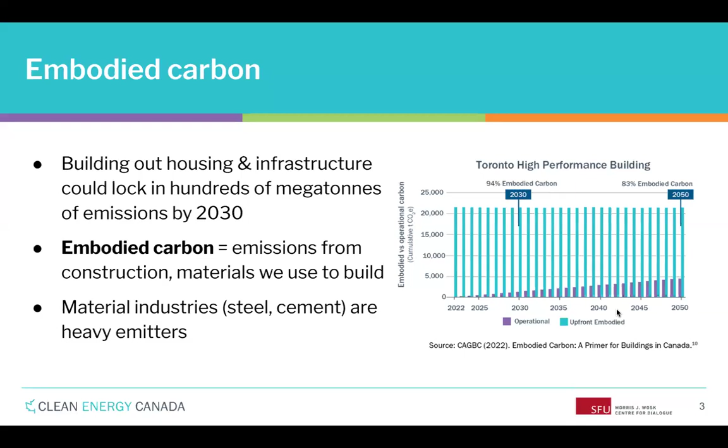Okay, here we are. Let me start by introducing what we are talking about. We talk a lot about the energy we use in our homes to heat, to cool, to charge our EV. But what's talked about a little bit less is all of the energy and all of the emissions that go into constructing buildings and infrastructure in the first place. Those emissions are what we call embodied emissions, or embodied carbon, and a lot of them come from emissions-heavy industries like steel, cement, and other building materials.

At Clean Energy Canada, we've been talking for a few years now to governments about what they can do to help. One key policy tool is Buy Clean. Governments make up about a third of the market in Canada for construction steel, cement and concrete. So if governments start asking for cleaner materials and buildings, they can really move the market. The federal government in Canada has already begun doing this for concrete and for steel, which Ryley will tell you more about in the panel.

But in these conversations, what came up a lot was, what is that going to cost, and will it increase the cost of building in a time when we really need to be... I'm now annotating these slides, that's not what I'm hoping to do. Can we go backwards, Kira?

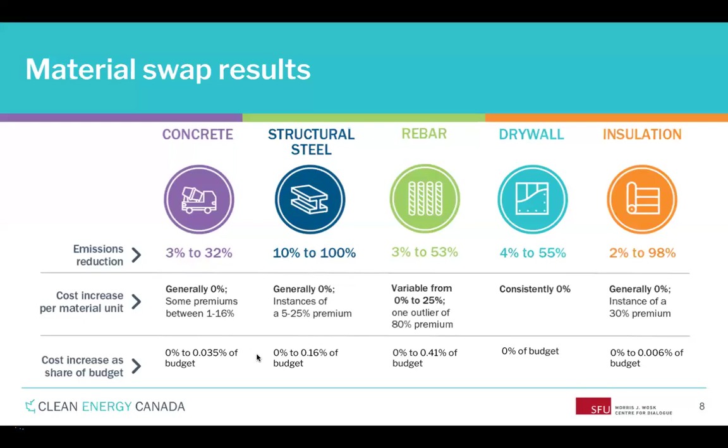Just to give another example of what this could look like: the cost increases here on the right are per material unit. So when we're talking about a 7% increase per cubic meter of concrete, for the cost of the whole project in that case it came to around $3,000. And we're talking here about a project that was tens of millions of dollars to construct the entire building.

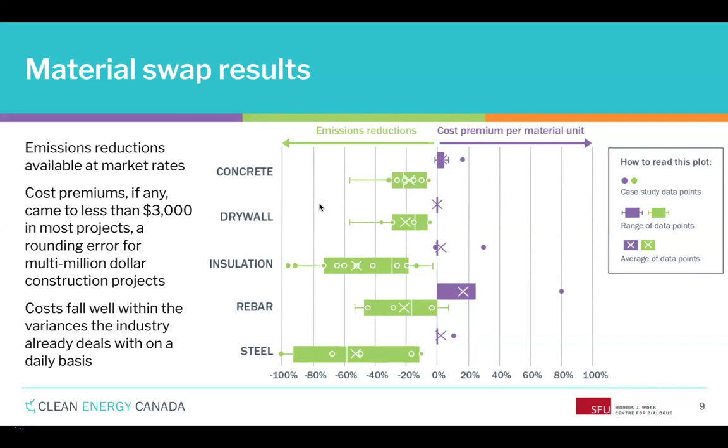We were actually positively surprised to find that for all of these case studies, you could swap out materials for their lower carbon equivalents and achieve a range of emissions reductions, most of the time without a cost increase. So that's a high flyer of the material study. Now I'll shift gears to talk about how we build and the design piece.

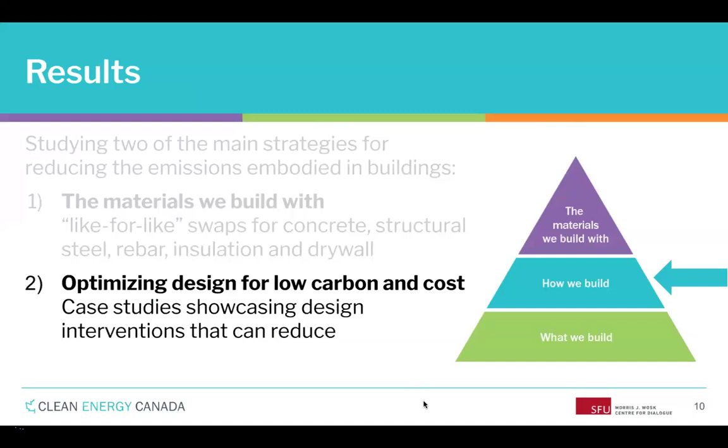This was led by Half Climate Designs, and they coordinated a consortium of architects and engineers. These are all based on real buildings that exist in Toronto. In each case, we have the original design, and then what are some small or big tweaks that could have been made to reduce the amount of material that we need.

So this first one is a townhouse, actually one of a row of six townhouses. I won't go through every single intervention in detail, but you can see these are all, I want to almost say, cosmetic changes. This is the same building, but the embodied carbon is cut by a quarter by doing things like using a different structure for the basement.

Or instead of having these little framing pieces around the window, the architects realized they could achieve the same result by using a different color brick. Visually it had a similar outcome, but you saved on materials, saving 9% of the emissions in the building.

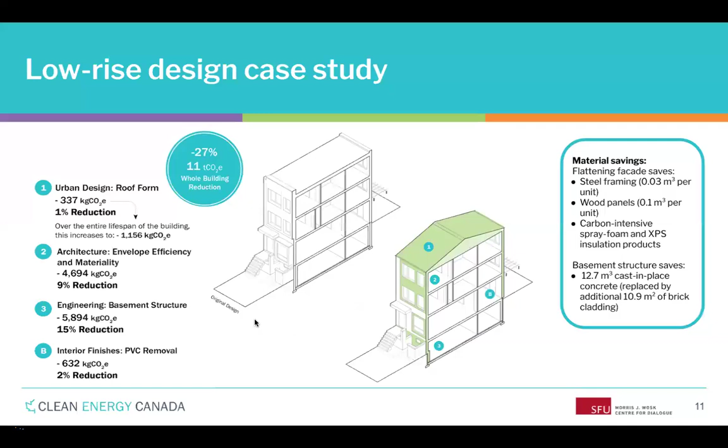But we also looked at some bigger interventions. So this is a mid-rise apartment building in Toronto. Here the research team looked at one of the most carbon intensive things that we do when building, which is building underground. So here, the research looks at what would have happened if instead of building a parking garage underground, we would have built it next to the building on the plot. And here you can still imagine having a rooftop amenity here, having a garden to make it still kind of an engaging space.

But just by pulling that out of the ground, that in itself reduced embodied emissions by 23%, while providing the same amount of housing, the same amount of parking. Building underground requires a lot more material, which is where those emissions reductions come from, but as you can see on the right here, saving that concrete and rebar alone is around $300,000 worth of material costs.

And not unimportant in our housing crisis right now, building underground takes a lot of time. So by doing something like this, you can not only cut cost, cut emissions, but you can also shorten the schedule and shorten the construction time. And the research team even did this neat calculation of how many trucks of digging up ground it would be to build underground.

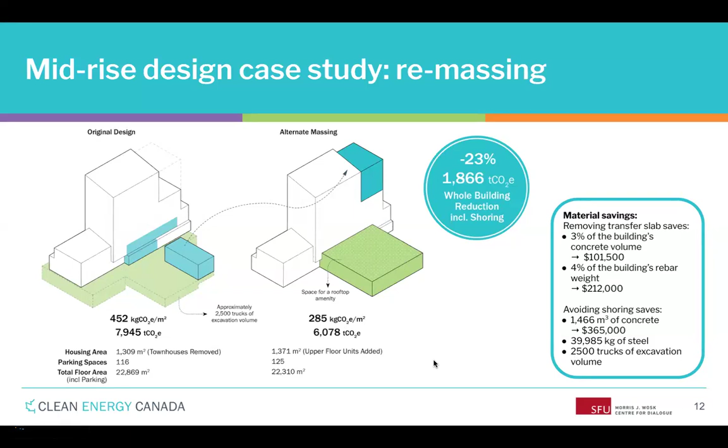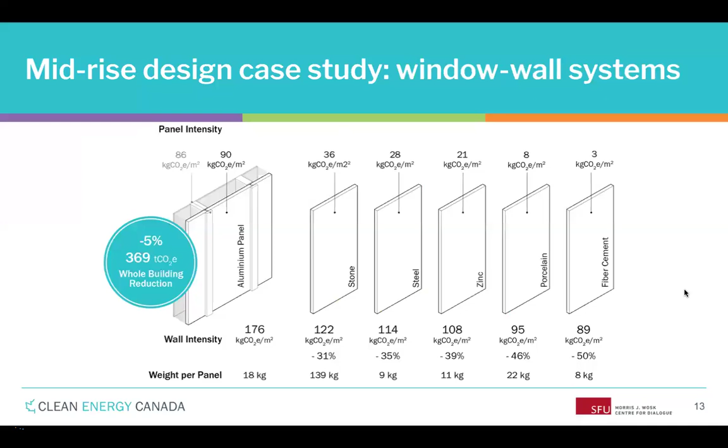But yeah, again, we also looked at some smaller things, like what if we use different materials for the window wall systems? So here's a range of options. Again, I don't have time to go into too much detail here.

Just want to show that the final case study was a high-rise building. And this is a typical Toronto tower. So we've got underground parking, then we've got a few levels of retail, so shops, and then I believe it's about 600 apartments. Without getting too technical here, because all of these layers have different functions, they have a different layout. And stacking those on top of each other requires a transfer slab, which is essentially a very thick layer of concrete, which, as you can imagine, is expensive and emissions intensive.

So here, the research team figured out that if they put the tower on the other side of the building, they could line up the pillars in each layer a little bit better and eliminate a lot of that transfer structure that was needed. And here again, we estimated what that would mean in terms of saving concrete, saving rebar, which in this case is over $3 million, and a 22% reduction in emissions.

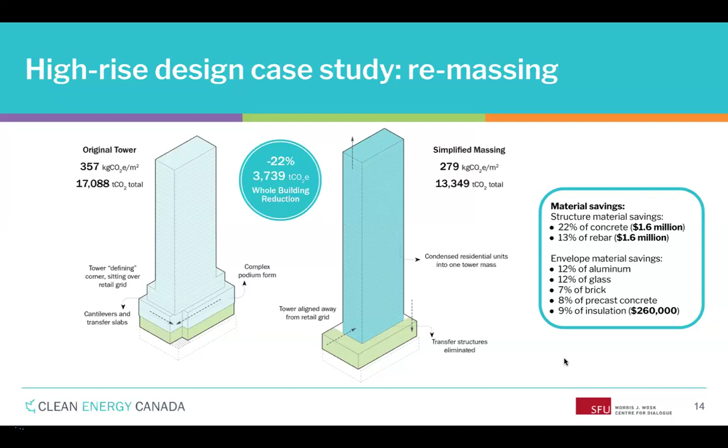So even though we studied these two things separately, we do want to emphasize that savings are usually best achieved by combining them. And also in terms of the cost, by reducing the amount of material you need, you might create a little bit of room in the budget, even if you have to pay a little bit more per kilogram of steel or per cubic meter of concrete. Yeah, so happy to go into more detail about all of this.

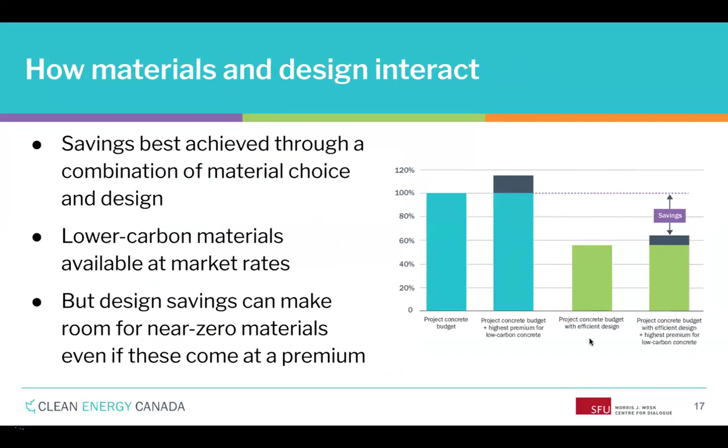So knowing that clean construction doesn't need to equal costly construction, what can governments do? The first and most important recommendation that we have in this report, and most of our work on this topic, is that buy clean policy, making sure that any building, any piece of infrastructure built by the government is built to be clean, and to move the market in that direction. And we have some more detailed recommendations on how to do that, which we might go into in the panel.

And for more the private sector side of things and project managers, it's really about thinking about carbon early on and making building clean a measurement of success in addition to cost as a measure of success, because that allows designers and construction teams to think early on about what the options are and make sure these opportunities aren't missed. And also encourage a little bit of creativity and thinking, how can we get the same function, but at lower carbon and lower costs?

And I think I will leave it at that and move it over to the panel.